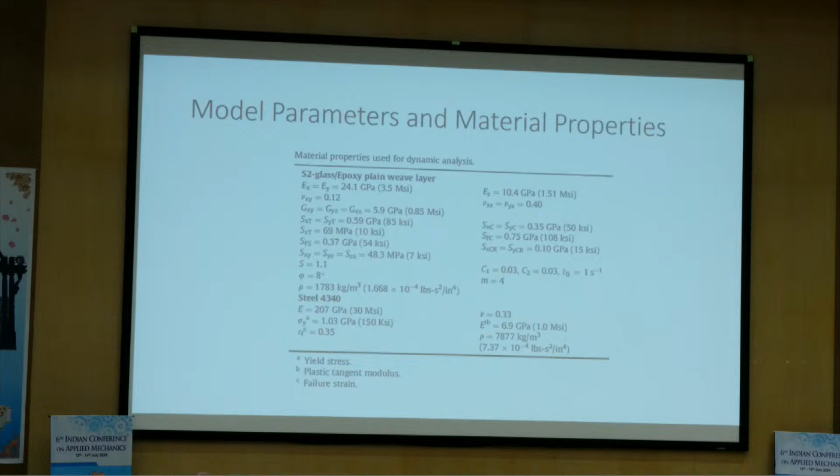Okay, this is a summary of the Yen model. Then let's go to the Goda and Girardot model. They are Italians, and they wrote the paper in 2021. Notice that, 2021 — so this field is still fertile.

You want to develop a PhD thesis topic? Here is a topic: you come up with your own GRP model, improve the existing model, or develop one from scratch, and you can do simulations. You have access to codes. DRDL, DRDO, all of them have codes. They have access to Abaqus and LS-DYNA. So you can perform a lot of simulations.

Now, what they did — they looked at body armor. Remember my first view graph, we used aluminum as the substrate to model. But real body armor has a composite substrate. So unless you have a good model, you cannot simulate or design body armor for the soldiers.

You want to reduce the weight of the armor — we spent $35 million and couldn't reduce it through experiments from 6 pounds to 5.8 pounds. That was from 2000 to 2008. I was a panel member for the US Army, and they spent $35 million to come up with reduced body armor, and we couldn't do it.

But then, with the advent of computing capabilities on desktop workstations, you guys can put together a cluster — you don't need a mainframe computer. Like when I was at IIT Kanpur, as a graduate student, I did the frequency analysis of the SLV3 rocket for random vibration.

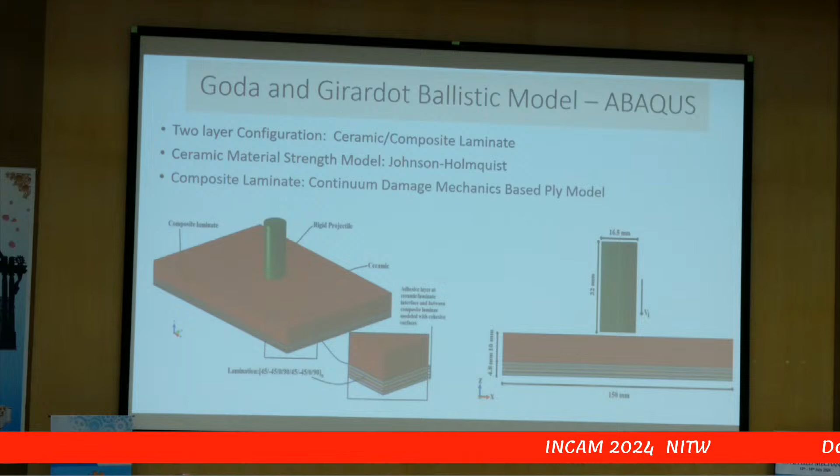So here, a cylindrical rod is penetrating a ceramic backed by a composite layer. In 2021, we can do it now. The project started in 1990 — it took 30 years to have a model. I'm not saying this is the model, I'm saying at least there is something going on, okay?

Okay, now if you look at this, again it's the same as the other model, the Yen model. It looks kind of different, but it's the same. If you watch the initiation function, it is again the local stress equal to the applied stress. This is a Macaulay bracket.

So if sigma 1 is positive, tension divided by 1 minus d1, like omega 1, d1, and then this is under tension plus under compression, another d1 minus or omega 2, then tension in the other direction, then compression in the other direction, and shear in other directions, giving you a fracture surface. You begin with lambda equal to 1, and then phi increases — phi is the applied load — and then the damage starts growing, okay?

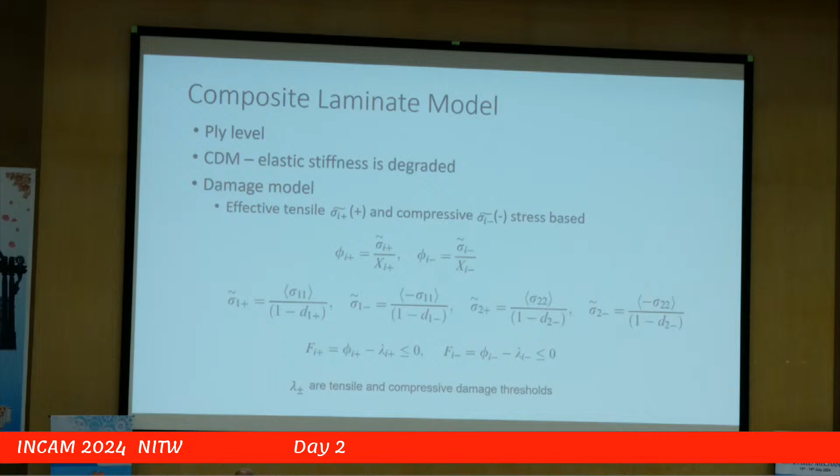It looks very different, but both models are very similar. This is a simpler model than the Yen model.

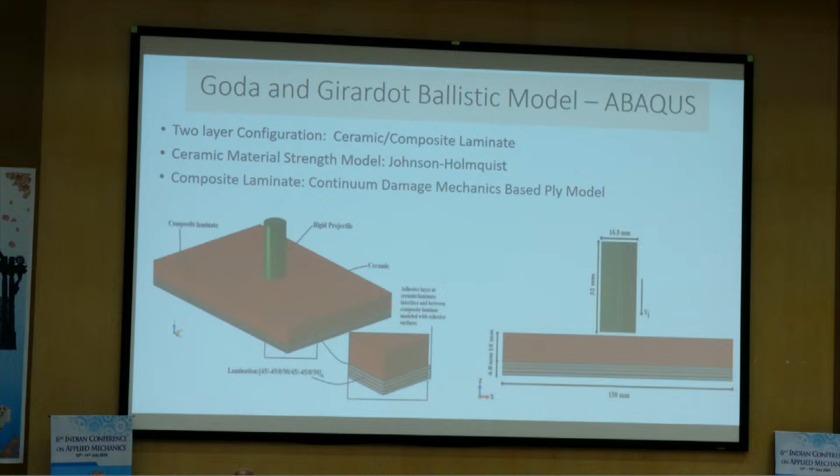Okay, they looked at this configuration, and then they performed simulations and came up with constants. And then this is what they did — oh wait a minute, this is the same model. Maybe it's a wrong view graph. What did I do?

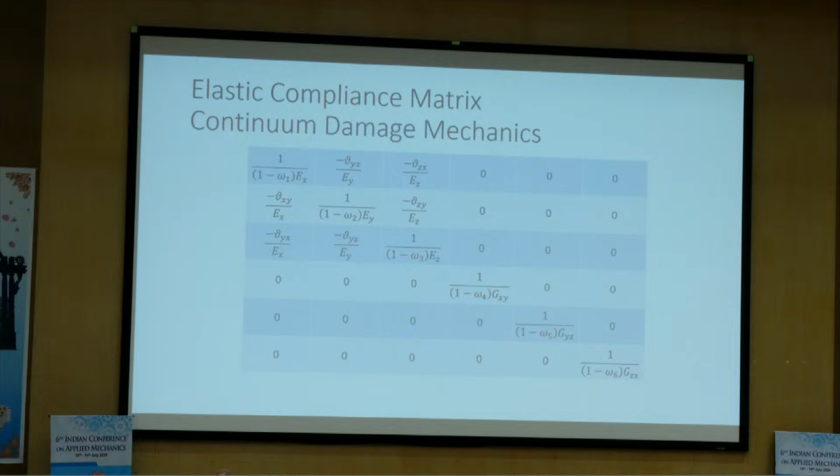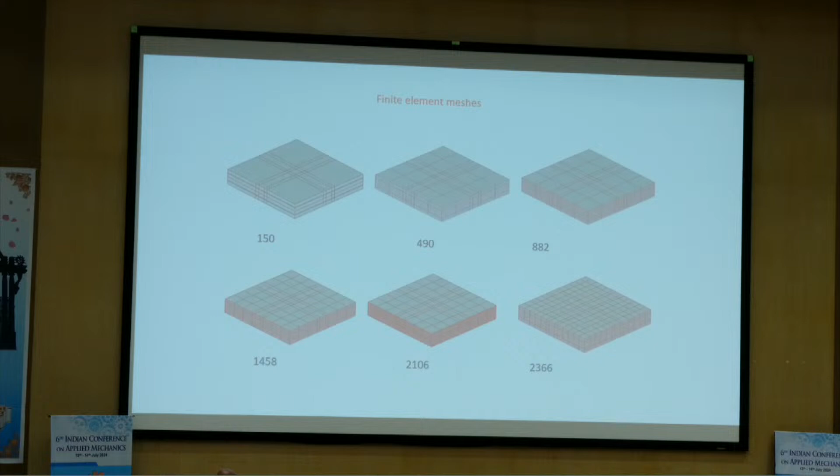I went too far. Am I going backward? Yeah, but, oh, sorry, got lost.

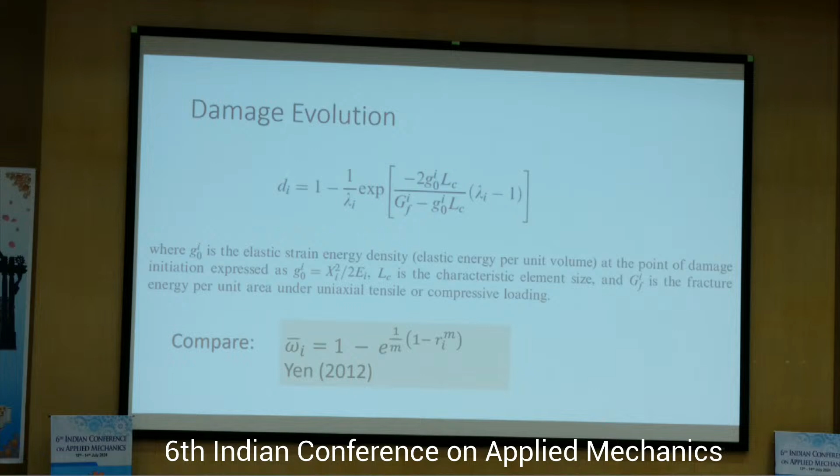Goda model, okay. So now there are damage initiation equations, 5 equations. Simple, this is stress: when applied stress exceeds the tensile strength, damage initiates. Big deal, right? You can do the test, know the strength, and Abaqus will calculate the local stress. Same thing in tension, compression, shear. You have shear strength, compressive strength, tensile strength measured from experiment. So you can move on with the damage initiation.

How about growth? Growth is always empirical. There's no physical model, and growth is so complex. A single crack is a big deal, you can follow a single crack, but here it's millions of cracks and millions of defects. Now here they assumed this expression for damage evolution.

When lambda equals 1, see, for different modes. If you have 8 modes of failure, D1, D2, D3 up to D8, you calculate lambda 1 up to lambda 8, and when lambda is 1, 1 minus 1 is 0, this term becomes 1, 1 minus 1, 0. Same thing. The model looks different, but it's the same thing, just different equations.

Compare: Omega equals 1 minus e to the power of that. R equals 1, 0, 1 minus 1, 0. Same thing here. So in a sense, all these CDM-based models have a set of initiation equations.

You can get it from open literature, or propose it in your PhD thesis—hey, by the way, I'm not happy with the Hashin model. You do some experiments, validate it, and propose an equation for damage initiation. Now, for damage growth, nobody will kill you if you change this equation. Big deal, you can change it based on your research, findings, invention, innovation, whatever it is.

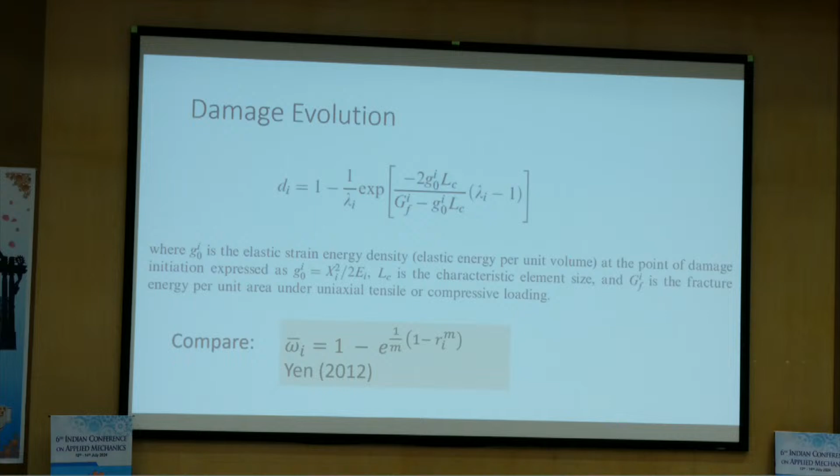So there is an initiation criterion, growth criterion, strain rate dependency, and then you degrade the modulus. That's the 4-part methodology that makes the composite model. You can introduce all types of failure, capture the failure damage mode with the appropriate equation, perform experiments, calibrate the constants, and tune them with code simulations, and you move forward.

And again, see that? Same thing, right? Young's modulus, shear modulus degraded. This is the plane stress—plane stress, you have a 2D model. Okay, but then the build-up is 3D.

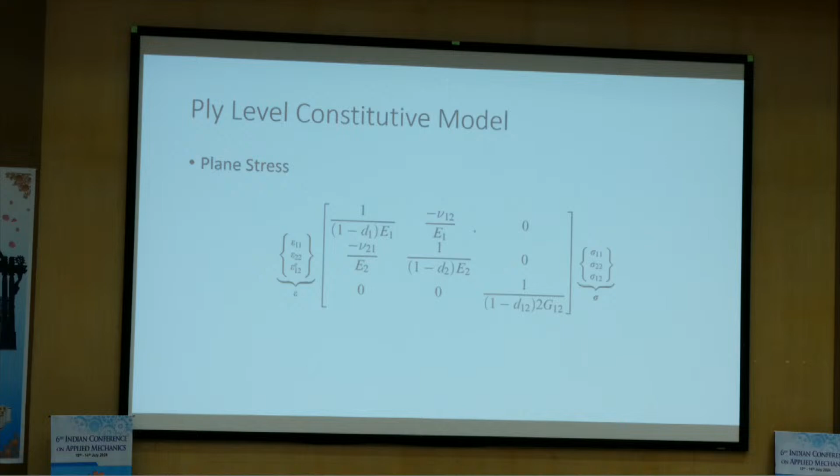One thing these people did was energy partitioning. They tracked all the energy due to friction at the interface between the two plies. Delamination—energy goes to delamination, energy goes to rupturing the fiber, energy goes to fiber bundle sliding failure. So all this damage consumes energy.

So the kinetic energy, the projectile's kinetic energy, the total energy is dissipated and dispersed through wave propagation and damage, deformation, and you keep track of them. You get the wrong result if you don't track the energy correctly. If you lose energy, that means you're doing something wrong. When you do an Abaqus calculation or any code calculation, keep an eye on the energy term—you might have put in some wrong parameters inadvertently, and you do this just to make sure your calculation is correct and you're getting realistic and meaningful results.

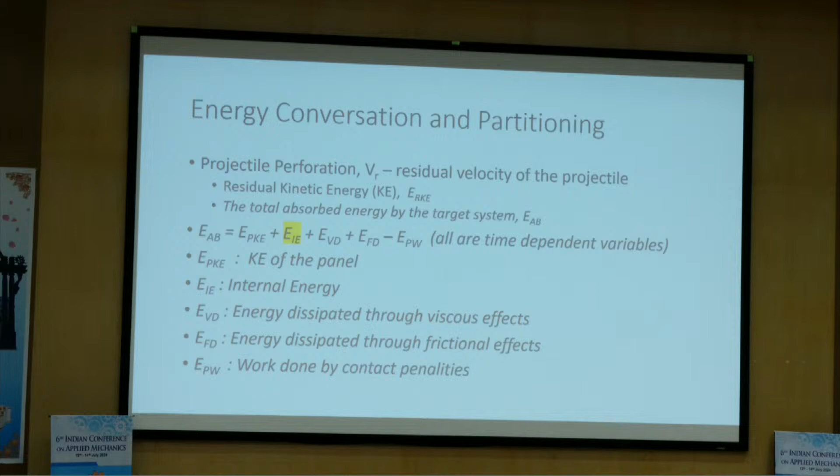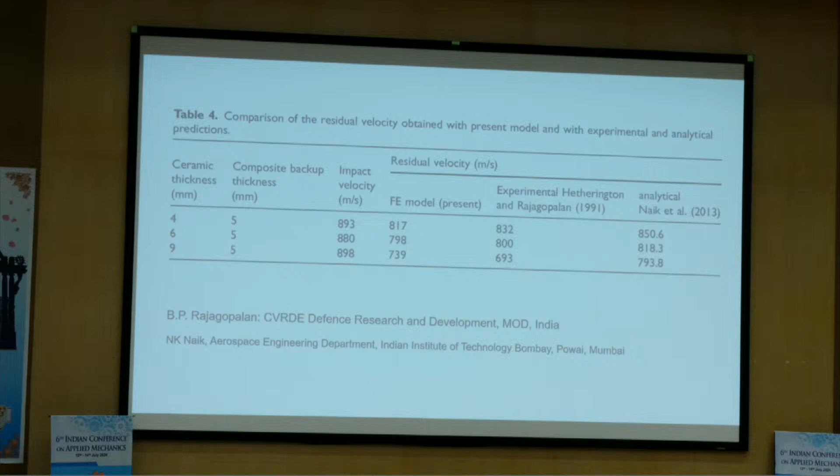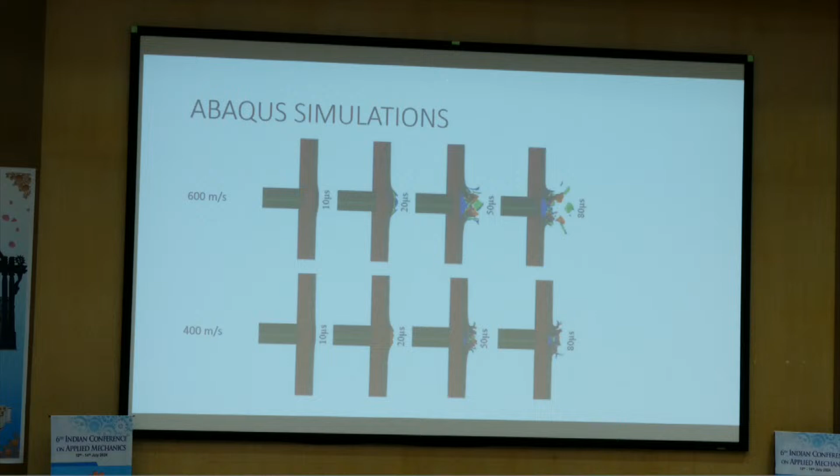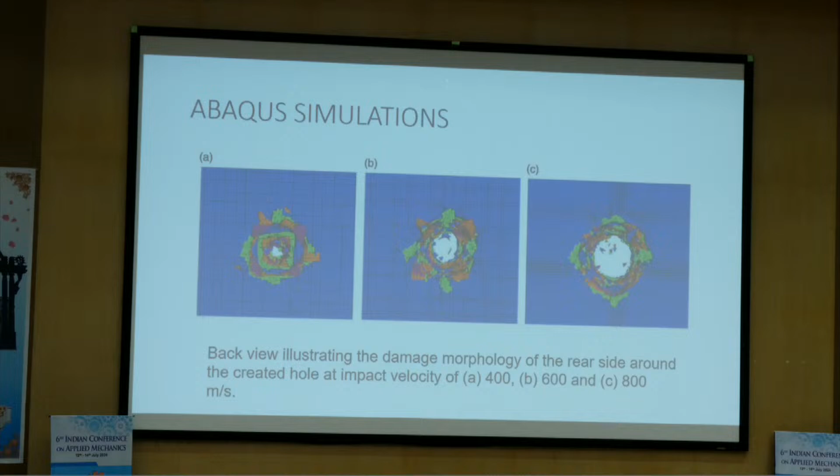So the parameters—they simulated about 4 experiments and showed at 600 and 400 meters per second the penetration of the cylinder. They examined the cavitation in the front and in the back, and compared with experiments. And this is the summary of the model.

Now let's go to the last one. The last one is a hyperelasticity model. Why do we need a hyperelasticity model? Because the fiber could be polymer fiber. When a projectile hits the target, the back surface of the target is going to bulge, and when it bulges, the fiber stretches. It could stretch up to 100%.

I've seen some experiments with a high-speed camera—the back plate just bulges. So then how can you use a simple elasticity model for the fiber? For carbon, I can understand it, brittle carbon just breaks. But then for polymer fiber like polyethylene, polycarbonate, S2 glass—not glass, fiber—the glass fiber also has more ductility. There's a table I've seen showing the amount of stretch in glass fiber is also high, even though you call it glass fiber, it has got ductility.

So we published 3 papers. This is the model that my students used and published a paper with. I had 2 master's students, one from Australia, one an American student, and one used LS-DYNA 3D, the other used Abaqus.

So where do you begin? You begin with—what time is that? I'll try to wrap it up in 10 minutes.

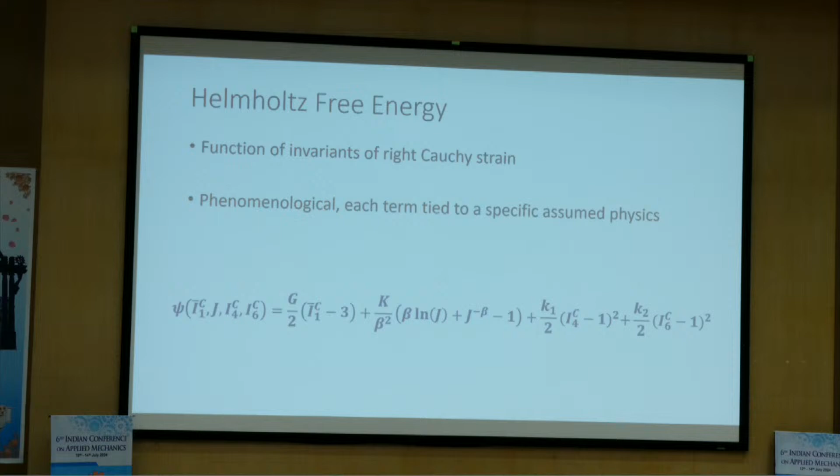Many of you know that constitutive equations can be derived using either the Gibbs free energy function or the Helmholtz free energy function. Helmholtz free energy is a function of the strain or stretch tensor, whereas Gibbs is a function of the stress tensor. So when you differentiate this psi with respect to strain, because this is Helmholtz free energy, you can...

Hello, you can just move this. Something else.

So when you do your PhD thesis, you either begin with Gibbs energy or Helmholtz energy, and you go through the literature. I could have given another paper on the micromechanical model for brittle materials developed by famous people like Sia Nemat-Nasser and several others, who worked like at Los Alamos National Lab. They all used either Gibbs energy or Helmholtz free energy. Once you take the differentiation using partial differential equations on the function, you get the constitutive equation, relating stress to strain or strain to stress.

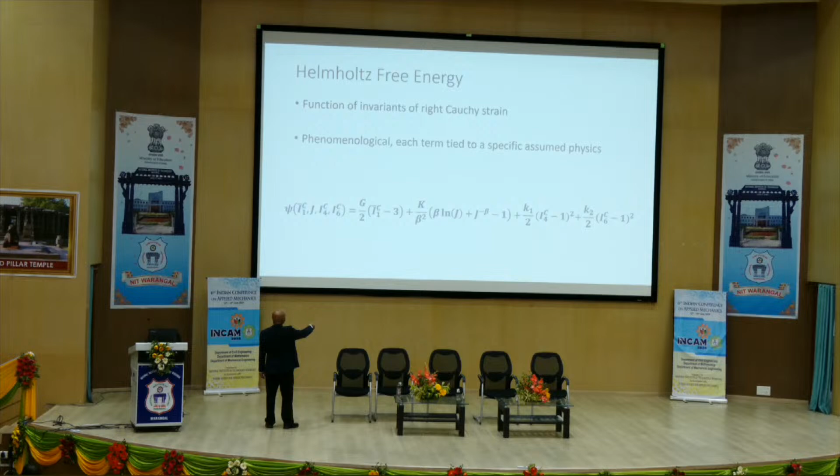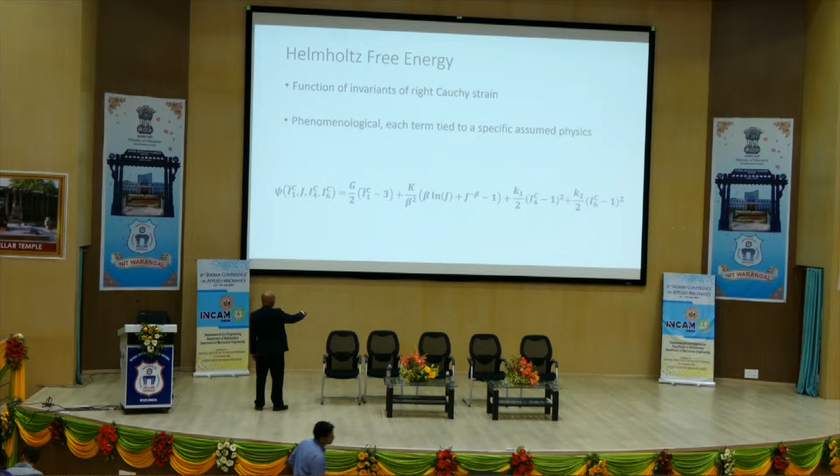So you can see the first term is the shear modulus, the second term is the bulk modulus. Since it's a hyperelasticity model, beta is the Ogden parameter, and this term describes rubber-like elastic material where the stress-strain curve, after some strain, suddenly goes up vertically. So beta captures that. J is the Jacobian, that is the volume - Jacobian. And this term is the fiber.

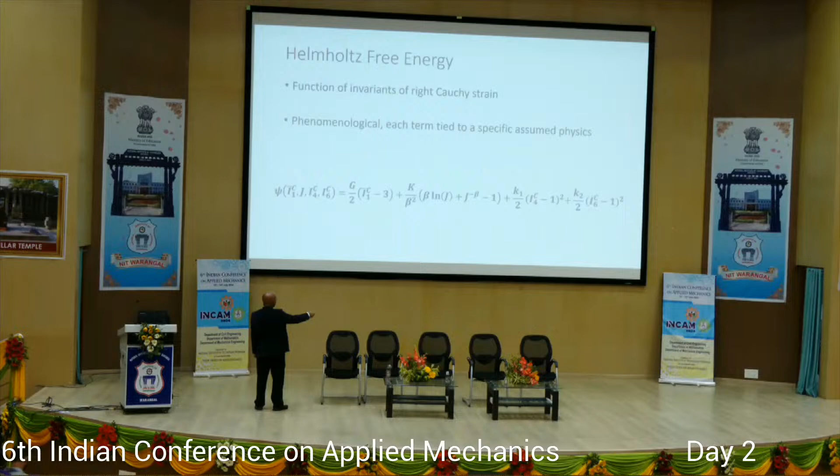I4 is the invariant that describes the stretching of fiber system 1. The fourth term describes stretching of fiber system 2. But in most composites, they don't use two fibers - they don't use S2 glass fiber and Kevlar fiber together. They use only one fiber system, so the fourth term would disappear, okay?

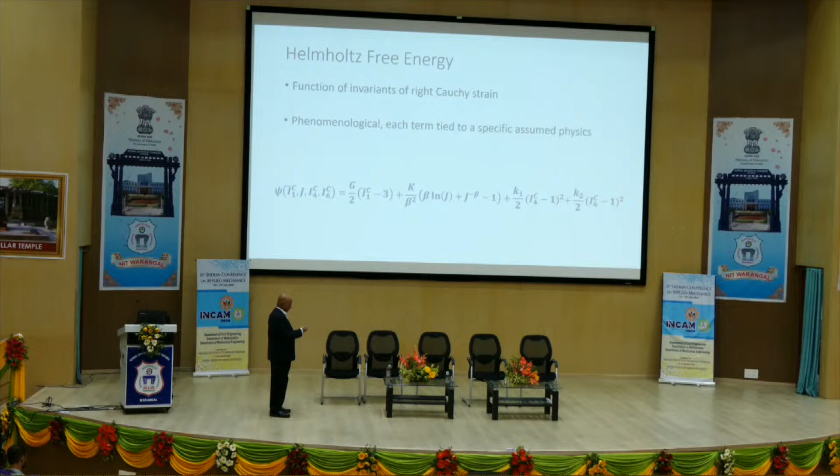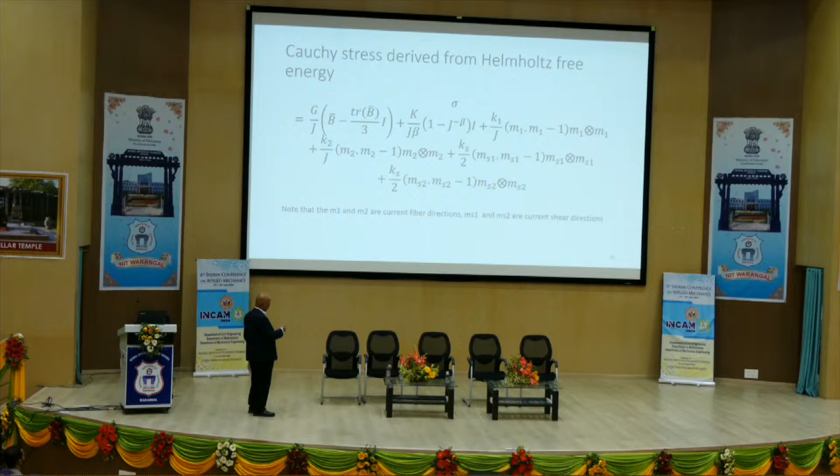Now we differentiate that equation, and you get the constitutive equation - this is it. That's just the derivation from differentiating the previous term. Now you use CDM - that means the first term, shear modulus, is degraded using 1 minus D to the power of m. The bulk modulus, again, is degraded by 1 minus Dm - that means matrix expansion or matrix contraction.

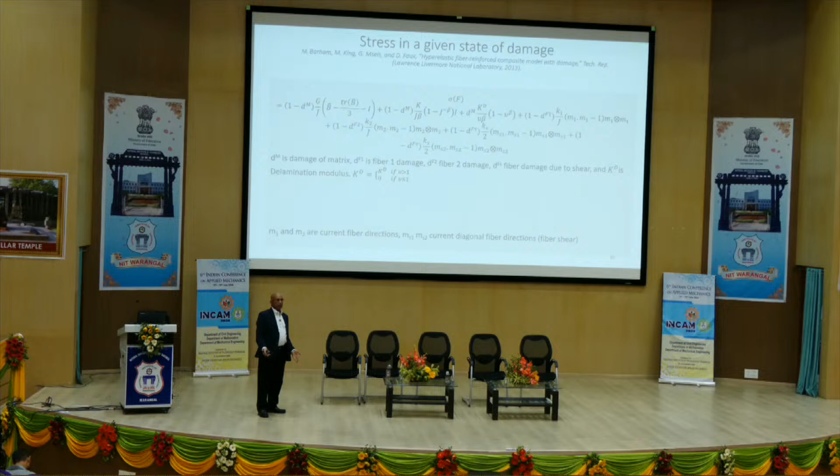Strain-based damage initiation here - we are using R as the initiation parameter. The initiation for matrix under shear cracking equals the Mises strain, which is the equivalent strain, divided by a material property, the strain at which you start seeing cracks in the matrix. So you can experimentally obtain this epsilon ms - a simple strain ratio describes the initiation of matrix cracking.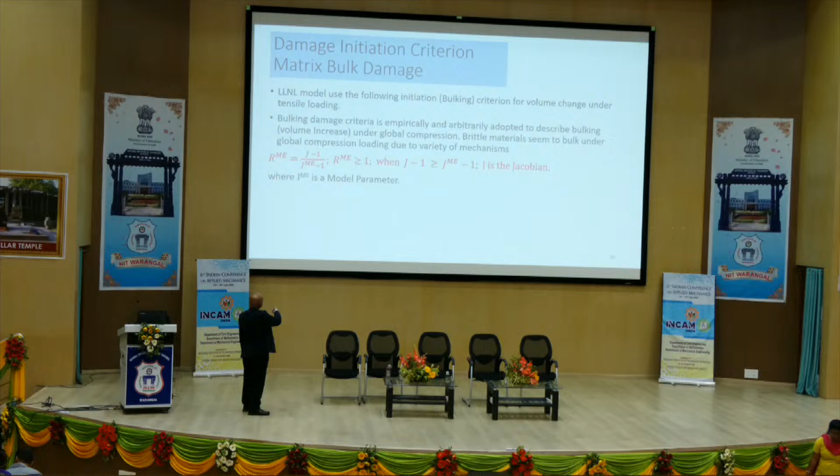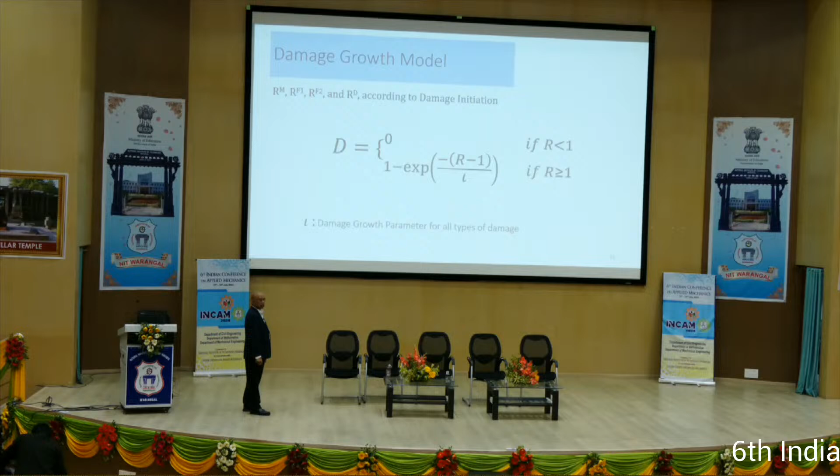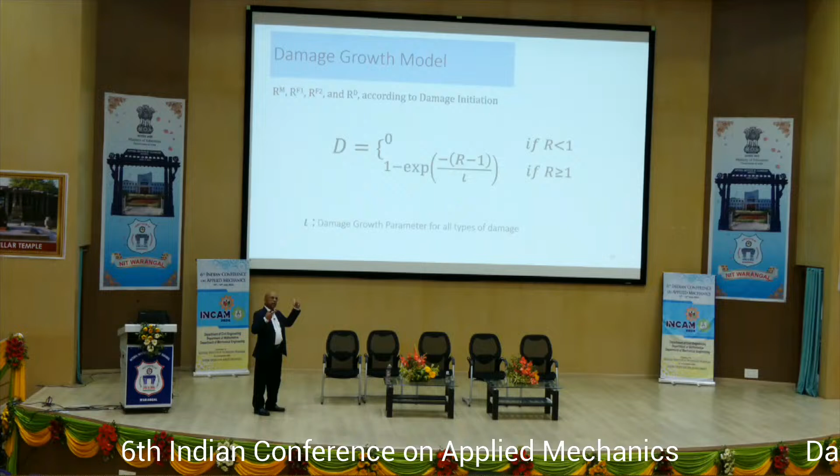Delamination uses Hashin's model, a familiar model. And then the growth, the N model, the other models I showed, that growth is an empirical model and is exponential. You can see when R equals 1, you get 1 minus 1, exponent to the power 0, so R equal to 1 means you are initiating damage. When R is greater than 1, the damage is growing. This equation captures that as R keeps increasing, the parameter iota controls the rate at which the growth occurs. This simple empirical model can do the job.

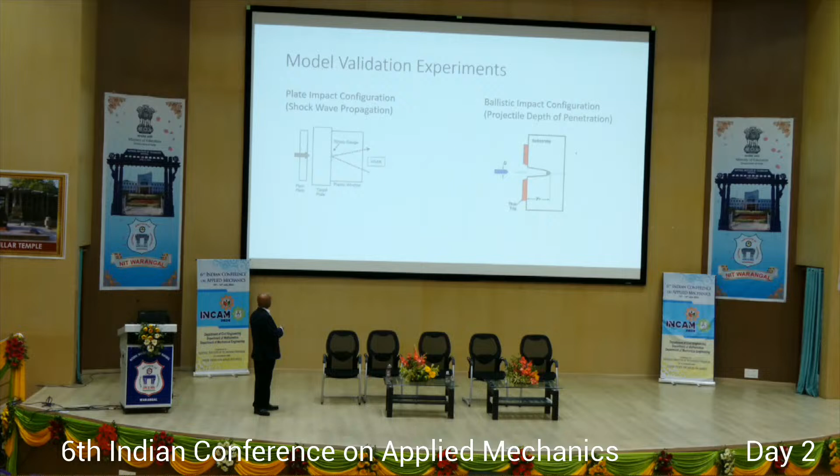So we implemented the model in both ALE3D, which is an Eulerian code, and Abaqus, a Lagrangian code. And we looked at two configurations: one is plate hitting a plate, which is shock wave propagation, and the other one is ballistic.

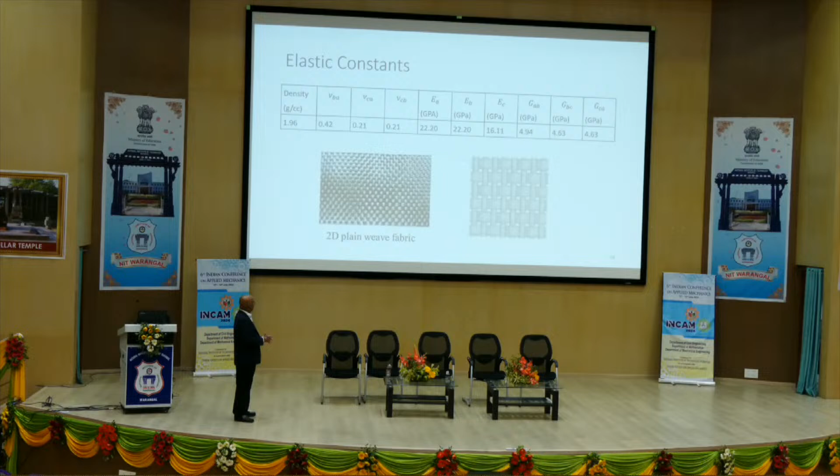This is the fiber 2D plain weave fabric. You can obtain the elastic parameters by using ultrasonic testing. I know Dr. Gopalan is here - you give a small piece to him, he will give you those constants. They have a fantastic measurement system at the Indian Institute of Science. And we did this at the Army Research Lab.

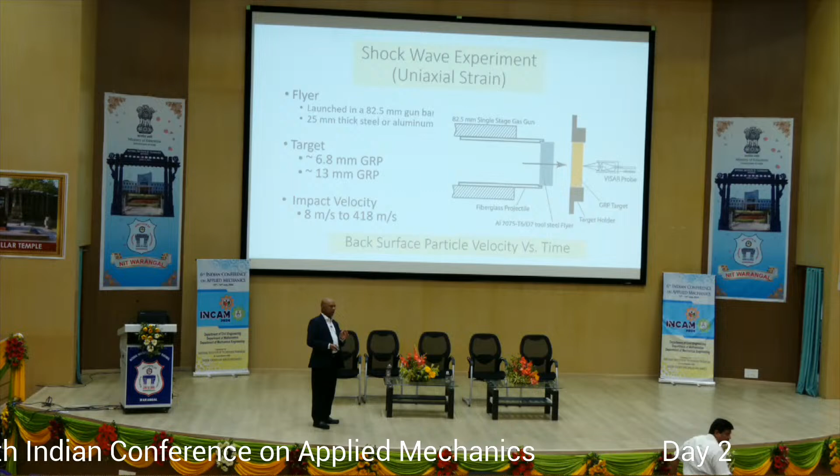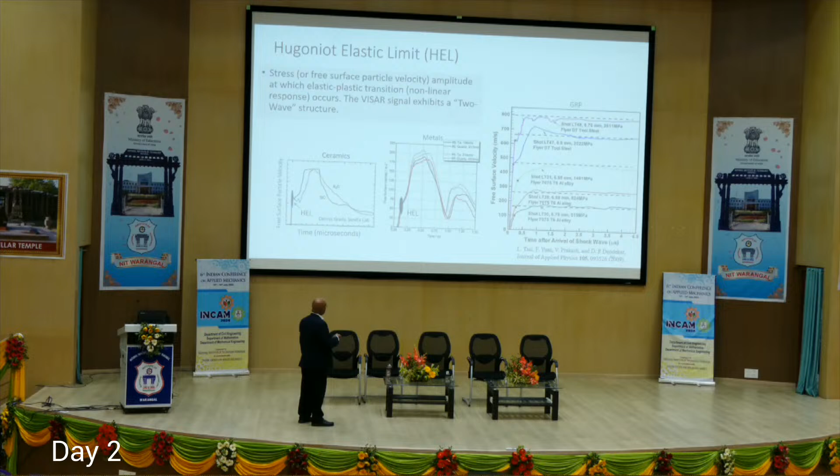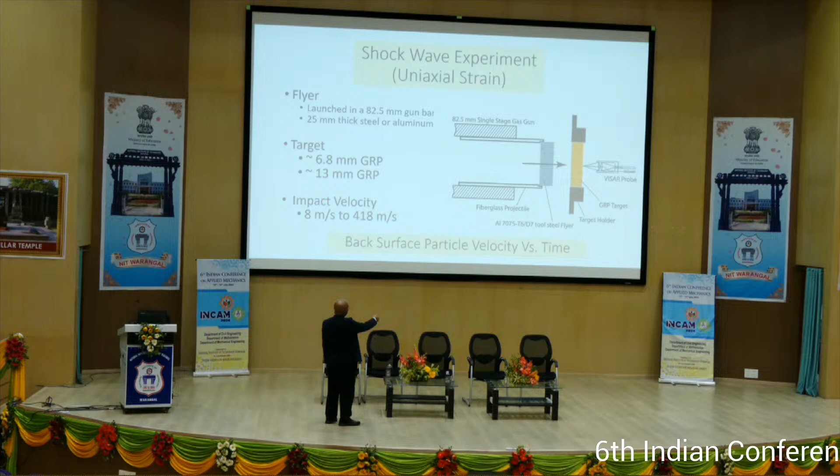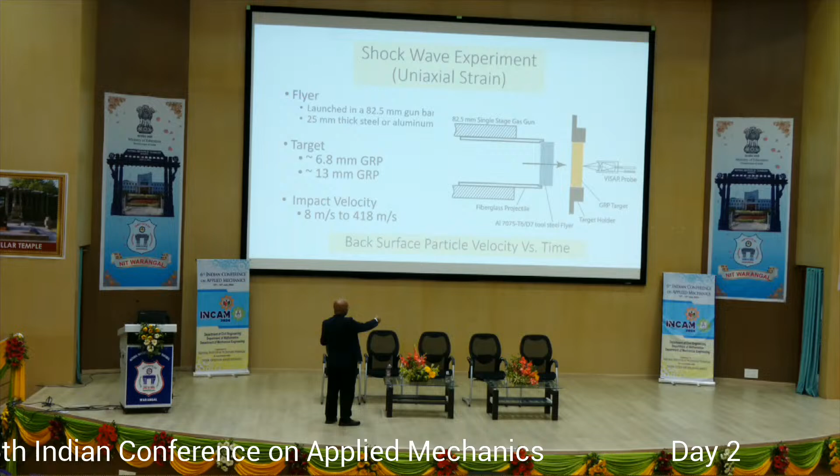And then we did the plate impact test. What is a plate impact test? Most of you may not know. It's a slick, good scientific experiment - I think IIT Kanpur may have it, or some other institution. It's very expensive, a very precise test. You hit one plate on another plate, and then you measure the back surface velocity - the target, which is GRP, and the flyer, which is steel or aluminum. It hits planar impact, so all material points move in one direction, and all other strains are zero. There is only one non-zero strain, which can be calculated by measuring the velocity versus time of the back surface. So the back surface particle velocity versus time becomes the data.

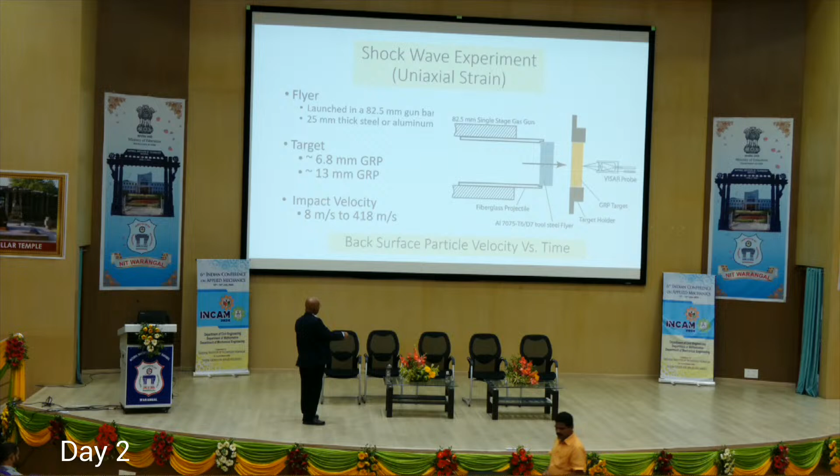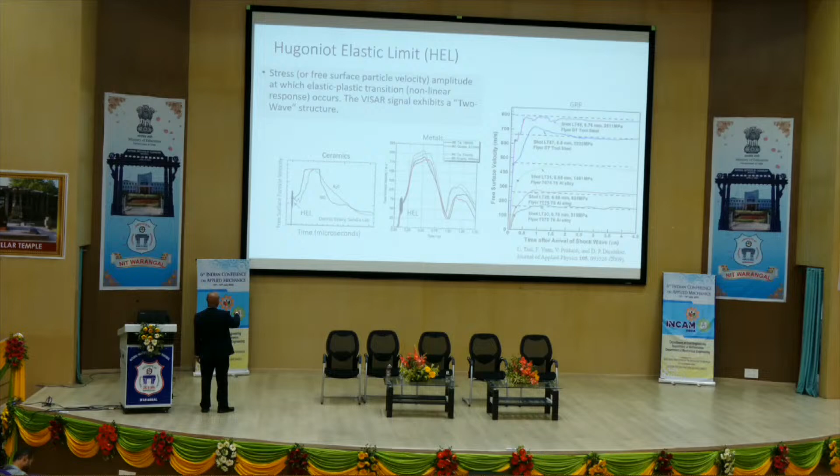Now look at three graphs. One for ceramics - if the target plate is ceramic, you get something like this: elastic, some transition to elastic-plastic or elastic-inelastic, then you see wave dispersion, and then it reaches the shock stress controlled by the equation of state, and then it releases. This is silicon carbide, that one is boron carbide.

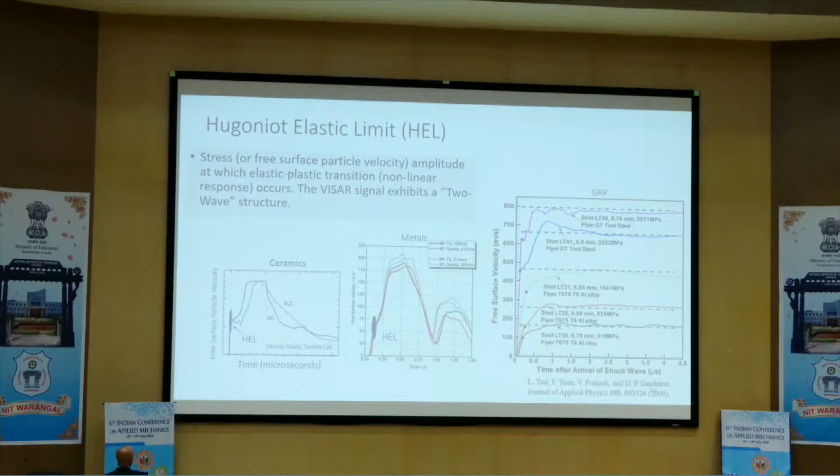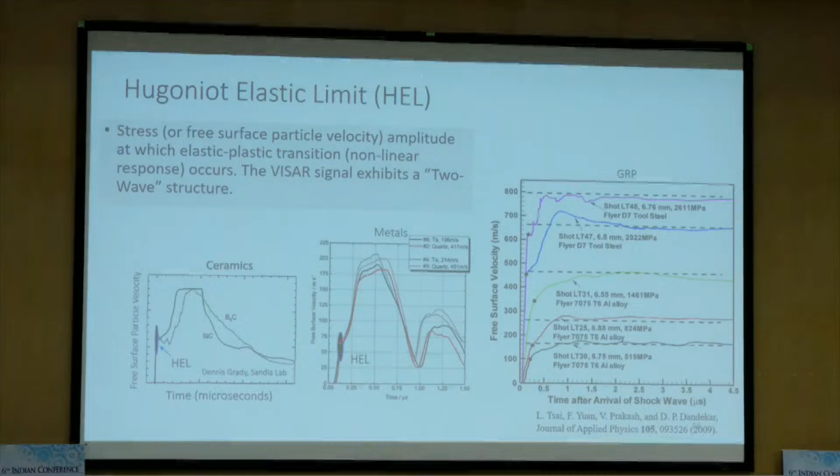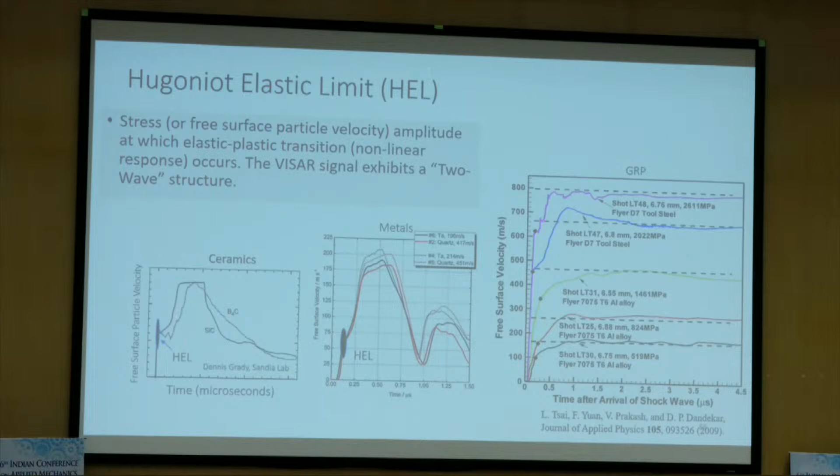Now metals - same thing, elastic, and then you have the Hugoniot elastic limit. That is the limit where elastic deformation ceases and inelastic deformation occurs. In metal it is plasticity, and in ceramic it is micro-cracking, dislocations, and twins. You see the elastic and then elastic-plastic transition. And of course this is spallation - a tensile failure in metal, which you won't see in ceramic. See that? It doesn't go up, it comes down and goes up - that is the spall signal. In ceramic there is no spall signal because the tensile strength becomes zero.

This is composite - a mess, I would call it. The data showed something at low velocity: it showed elastic behavior, then a curve, then shock stress. As you increase the velocity, you again see elastic behavior, then dispersion, serious dispersion. You should expect that, right? It has a weave, it has fiber, it has dissimilar materials, it has impedance mismatch everywhere, and it has interfaces. So you expect dispersion, and that's what the plate impact test showed.

Can we reproduce that using the so-called hyperelasticity model? We will see that.

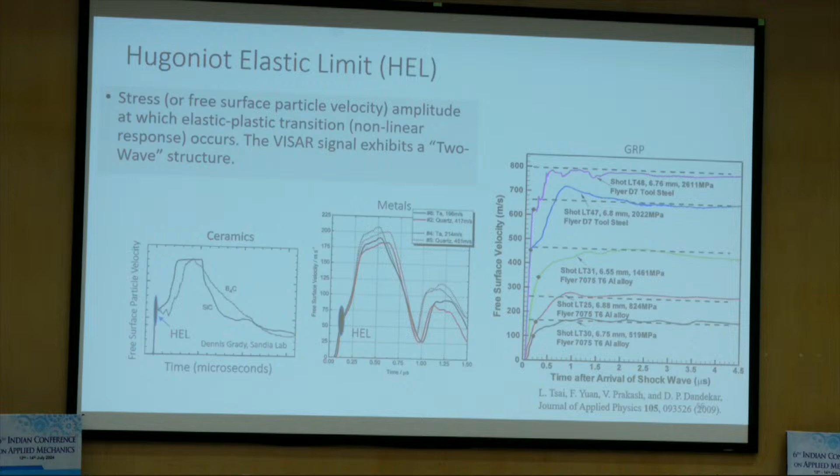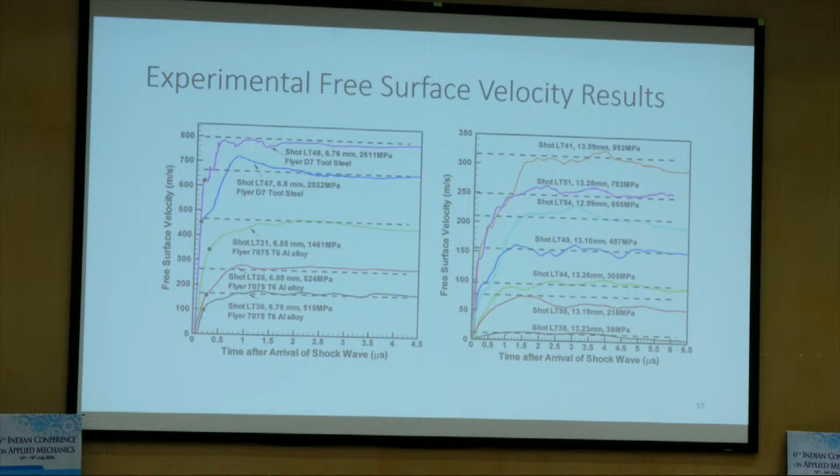This is an experiment performed at Case Western University by Vikas Prakash, with funding from the Army, in 2009. They did two tests - one thick composite, one thin composite. The thin composite is 6.8 millimeters, and the thick composite is double that. They got this VISAR trace or signal, and we tried to model this. We used ALE3D, got all the parameters, and then did some sensitivity study.

What is a sensitivity study? You have parameters in your model. First you see how each parameter, when changed, affects the particle velocity in your simulation. So here is an example - one parameter is the damage initiation parameter under compression. And we said this is important: when you put a material under compression in all directions, can you expand the volume?

The specimen is compressed axially, laterally. Complete inertial confinement.

Can you open up voids in brittle materials? Yes, you can. The mechanism is called the wing crack mechanism because brittle materials have millions of flaws. Each flaw is a tiny crack. When you put them under compression, what happens?

Locally at the flaw tip, the stress is not compressive, it is tensile. So applied mechanics people theoretically said brittle materials will fail, and bulk modulus will degrade under compression. Whereas under the equation of state, bulk modulus increases under compression. Brittle materials under compression expand inside at the crack tip, so the bulk modulus is degraded due to tensile crack opening at the tip.

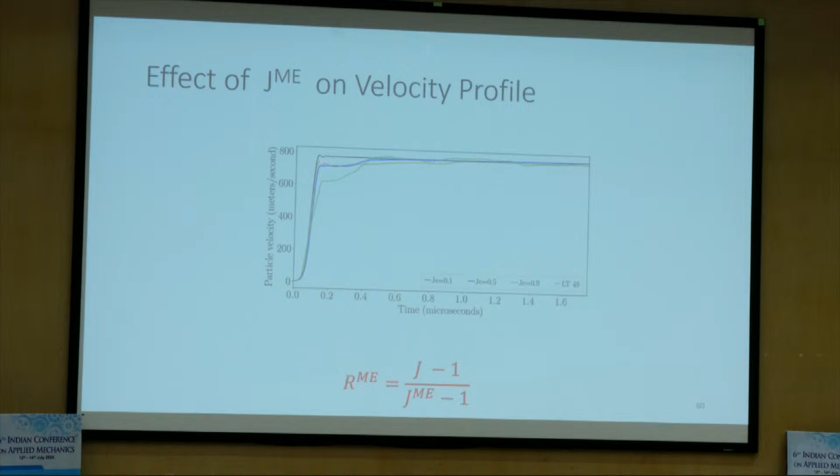Okay, let's go to the next one. This is matrix cracking under shear. Look at the growth parameter, iota, you change it, and look at the way it changes. Now that's the Hugoniot elastic limit, and you can see it significantly affects the profile. That tells you that matrix cracking is changing the profile.

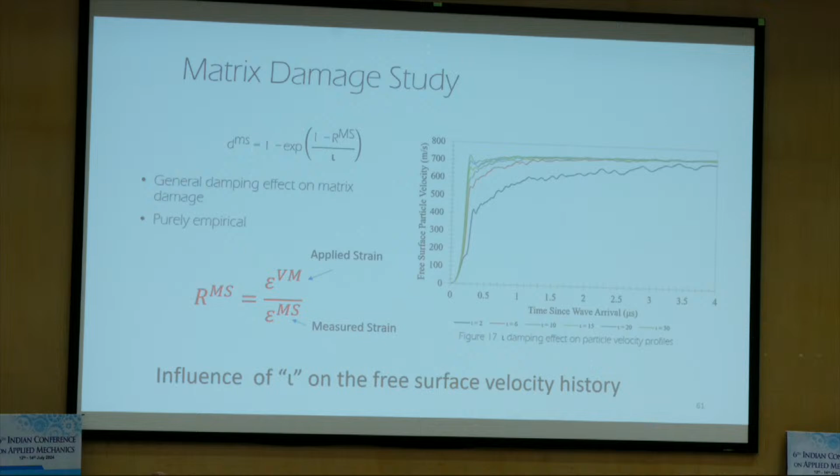That means when the matrix cracks, you develop inelastic deformation, and the parameter can be used to model that. The second term, the Ogden parameter, usually used for rubber type material, affects the free surface velocity when you change its values. You get different behavior, but this is the experiment.

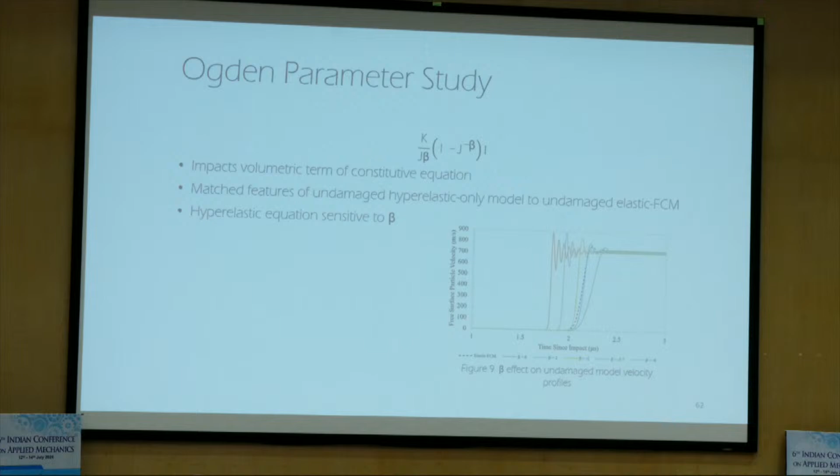So what you do, you pick up that value for that parameter, beta. For the Ogden parameter, we chose -2 because that matched the experiment. And it goes on and on.

Okay, this is the element size study. If you're using this for design of anything you're working on, first you do some mesh. Your mesh can affect your result, so you don't just do one mesh and get a solution and move on. You try a coarse mesh, an intermediate mesh, and a very fine mesh. If they give similar results, you're in good shape.

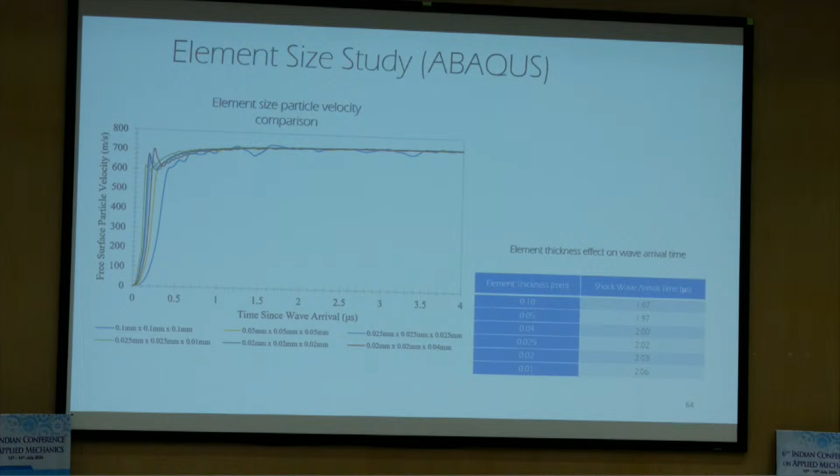And this is the simulation of the plate impact test at different velocities. You can see that nicely: this is the lowest velocity, that's the highest velocity, and the Hugoniot elastic limit, and you see the dispersion of the wave as it reaches the peak, which is controlled by the equation of state.

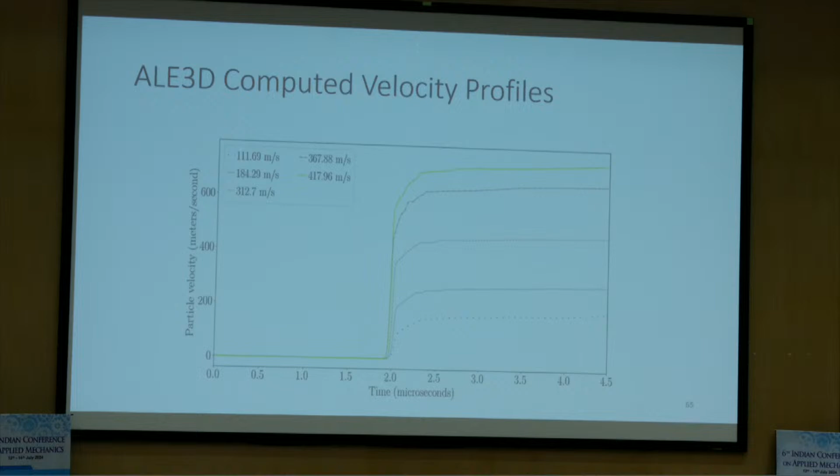We also did some diagnostics to see axial stress versus lateral stress, and you can examine that damage: the lateral stress is constant and then it increases. This axis is damage, bulk damage, where below 1 means no damage and above 1 means damage. You see it's all below 1, so the bulk modulus is not changing much.

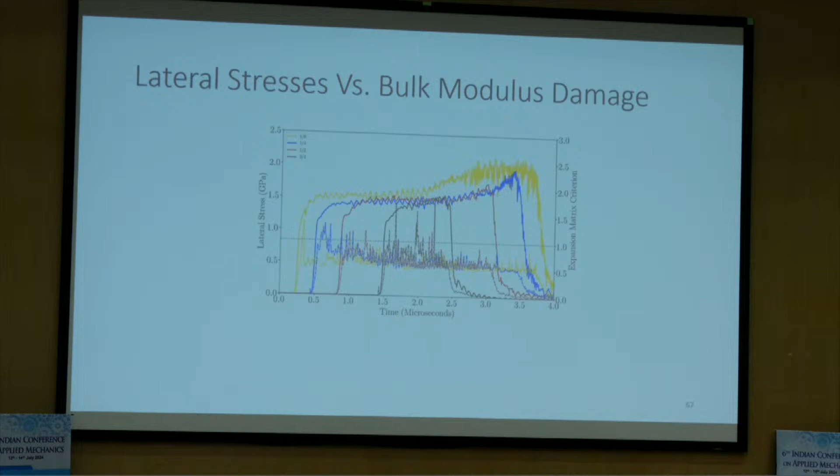Okay, this is the Hugoniot. If you're a shock physicist, you'll understand. Initially, this is the shock stress versus volumetric strain. You begin at 0 and compress the material along this line, that's the original modulus. It goes up, then damage initiates, and you unload at that point, coming back here to 0.

So eventually, if damage occurred, the degraded modulus went from 22 to 17. And then it moves toward the hydrostat, which is the pressure-volume equation of state. 15.8 is the bulk modulus in the hydrostat.

Whereas the slope of this is not the square root of k over rho, it's the square root of k plus 4/3 g over rho. So the wave speed under uniaxial strain is different than the wave speed under uniaxial stress, which is different than the wave speed under a spherical wave. So you have to be very careful to understand this.

So it's beautiful. The model nicely captures the original modulus, the degradation of the modulus, and eventually reaching the hydrostat.

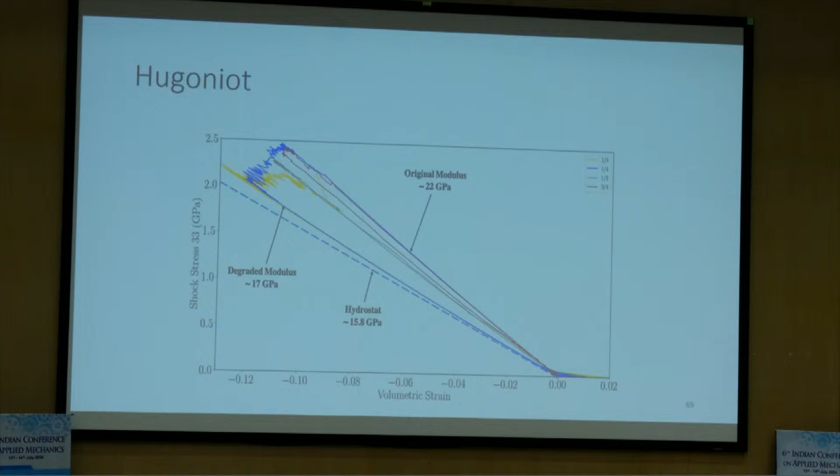It's very complex because the viscous effects are dominating, and there's room to improve the model by introducing some viscosity parameters. So they all did relatively well, given the complexity of composite, you can't match exactly. There's also statistical scatter - you do 10 tests in GRP, you won't get exactly the same velocity versus time. Very similar, but the slope will be different. Given that scatter in the experiment, I think the hyperelasticity CDM-based model is able to reproduce shock wave experiments.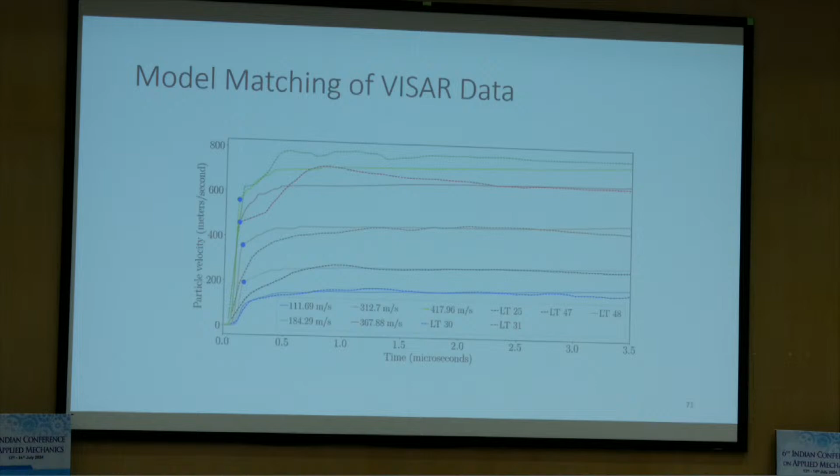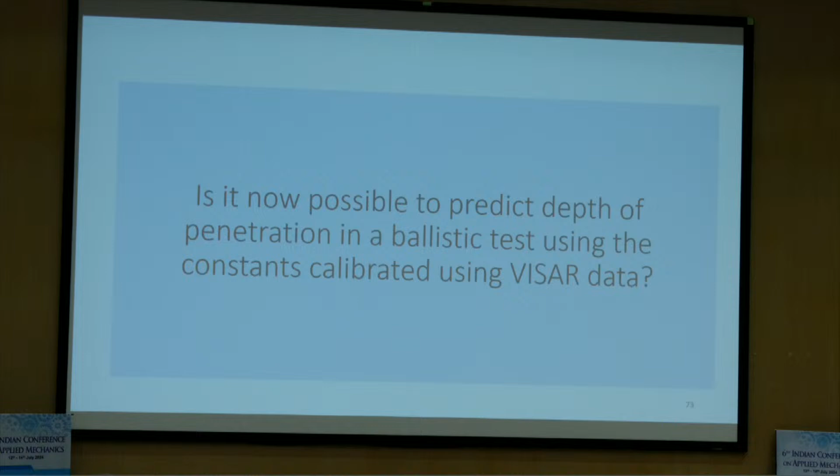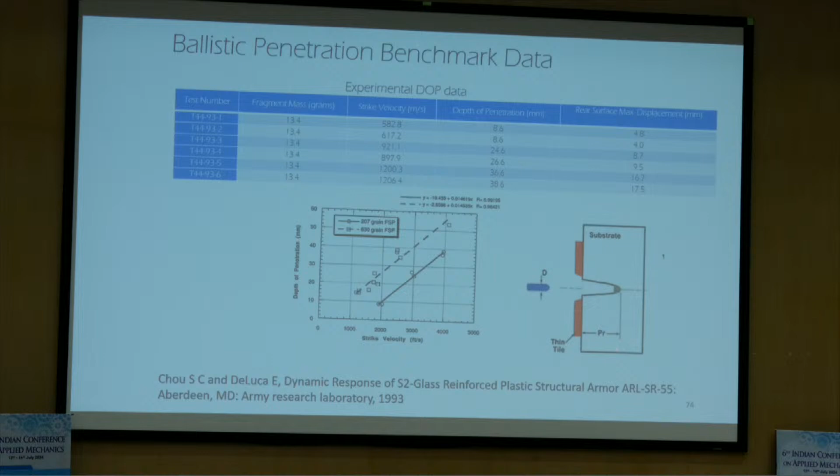So then we thought, okay, we got all the parameters, and we thought, how about we use the same parameters, which we calibrated using the plate impact test, to predict depth of penetration in a ballistic test. That is the ballistic test where the bullet stops inside the target, and you can measure how much depth the projectile penetrated. We have data for that, and we came up with a design.

This design is bad, really bad. We got a bad result, but later we realized that this kind of expansion of mesh won't work. You really want an accurate, realistic result from this code - equal, all elements equal. It doesn't matter, elements away from the location of the projectile, everything is the same. The projectile and target aspect ratio of your element should be the same. You may end up with 2-3 million elements, but one calculation will give you the right result. Right now we are doing about 5 million element simulation for GRP with the delamination criterion, and we expect to get a very good result.

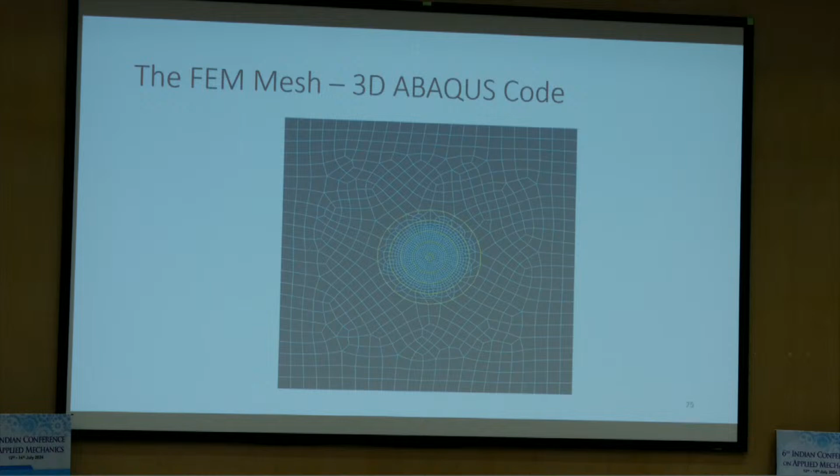So we did the simulation with uniform mesh - this is uniform, not the other mesh. The other mesh gave a bad result. So this one, all uniform. See here? Same - look at the resolution, same. So this predicted and matched with the experiment. We calibrated 2 more parameters for the fiber.

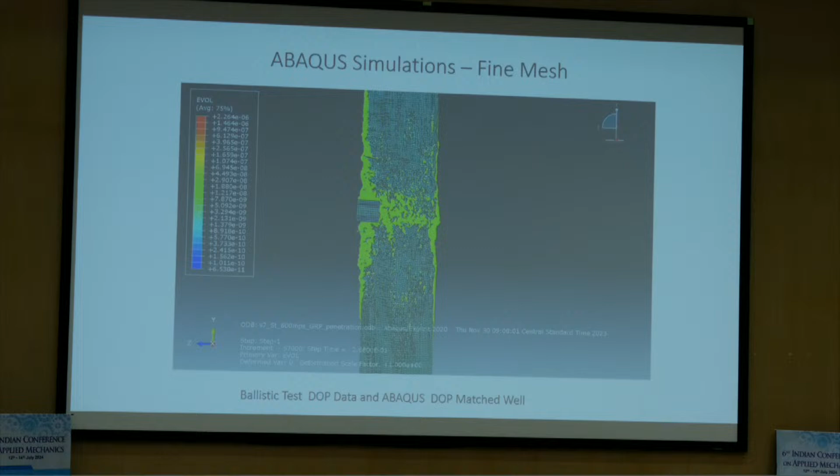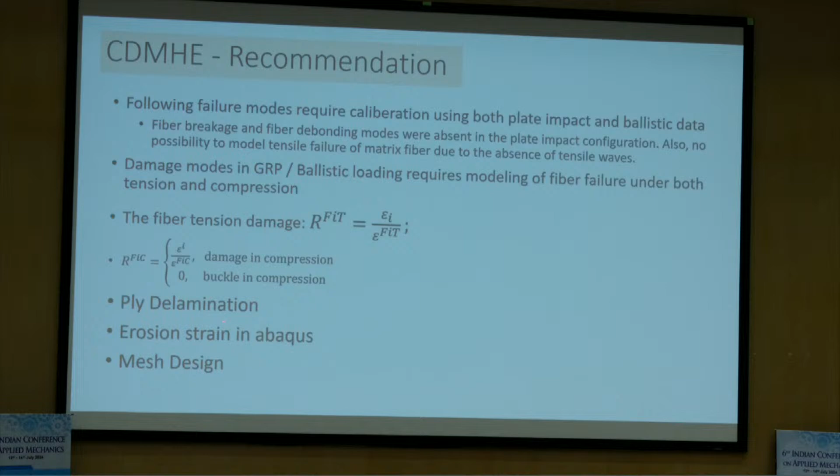So in summary, there's room for the model - the CDM hyperelasticity model can be improved. And actually the fiber parameters we did not touch. But there's a PhD student working on it now. We want to look at the fiber failure more closely to make sure we can make predictions. And mesh design is important - your erosion strain can create problems. The ply delamination, the friction between the plies, all of that is still out there.

So I presented 4 models. All the models have commonality. The initiation criterion, growth criterion, strain rate dependency - they're all the same. And the degradation of the stiffness, they are all the same. The only thing is each author used different types of equations, but the methodology is the same. So if you are doing a PhD in penetration mechanics, looking at complex composite materials, here is a starting point. Go grab all the papers, go through all the equations, grasp it, and then make progress in your thesis. With that, thank you very much.

Sorry I took a lot of your time. Thank you.

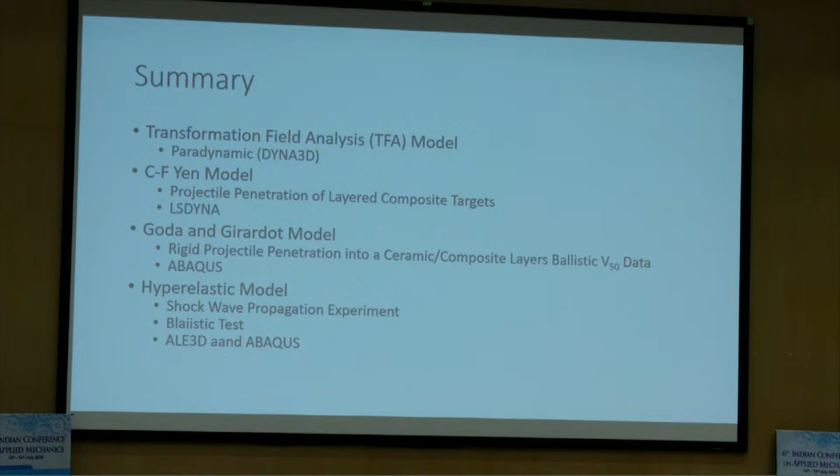For example, most of the phenomena we are trying to model are very complex, obviously, and therefore we have to go for empiricism. But empirical models have limitations - they can only match up to what your experiments have conducted. The reason we develop models is to do predictions beyond what experiments do, and therefore the validity of empirical models, be it Johnson Cook or anything, is valid only up to the range where experiments are already done. So do you have any comments on this?

Yeah, sure. First of all, let me tell you, Dr. Lakshman Rao, that you cannot go away from empiricism. Empirical models will exist forever. Unfortunately or fortunately, if empirical models are calibrated properly, you can predict within that range like you mentioned. If the applied pressure is 5 times more than the pressure and the strain rate is 5 times more than the strain rate, then what happens? You get into trouble - you are extrapolating. But in some cases it may work if it's saturated at a certain strain rate and not changing much after that, then you are okay. So you have to be careful. This comment is definitely something I wanted to make, but I did not. But you have to be careful. My point is, all micro-physical models, micromechanical models will have empirical equations inside. You can't escape from that.